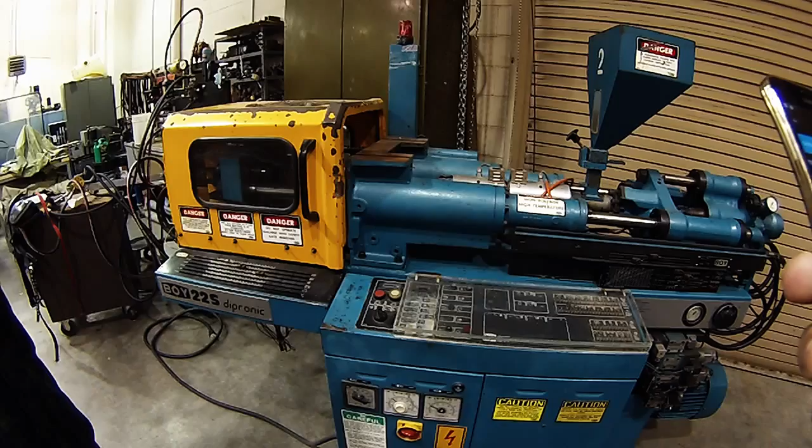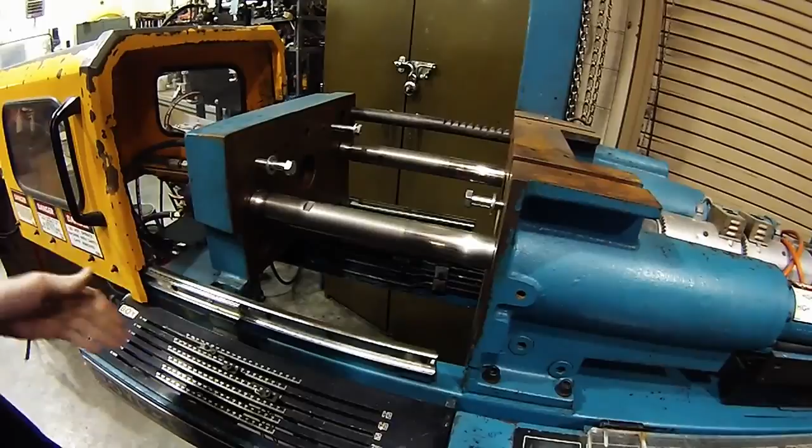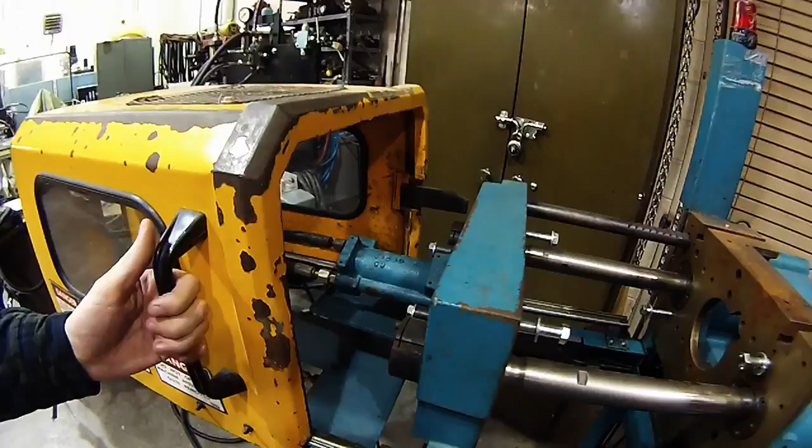So first we're going to go over some basics of this German-made Boy 22S that MSU recently purchased. We have a little protective cover here. And then our fit system is going to slide in here and bolt one side to here, one side to here. Your two mold halves are going to sit inside of that. Then over here we have our hydraulics that run the ejector plate, which ejects the part after it's been dried or solidified.

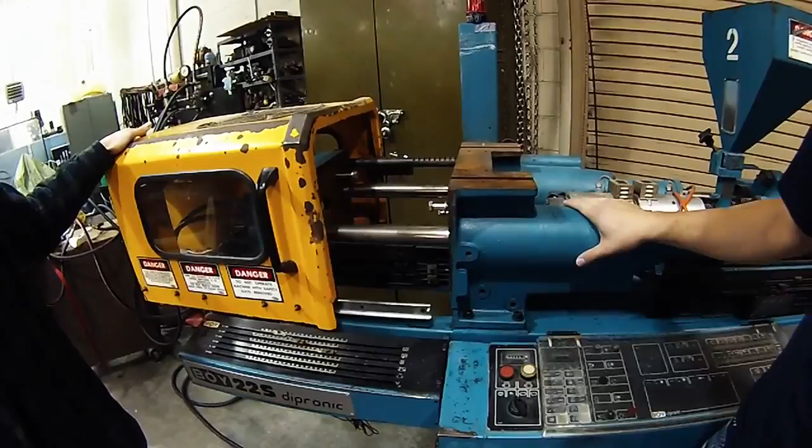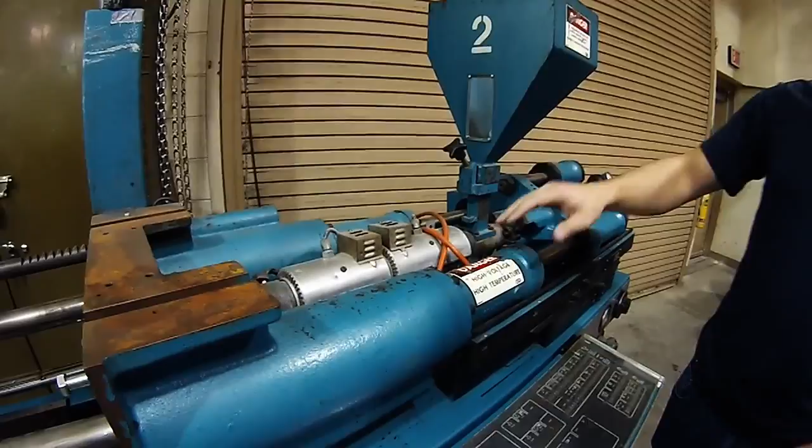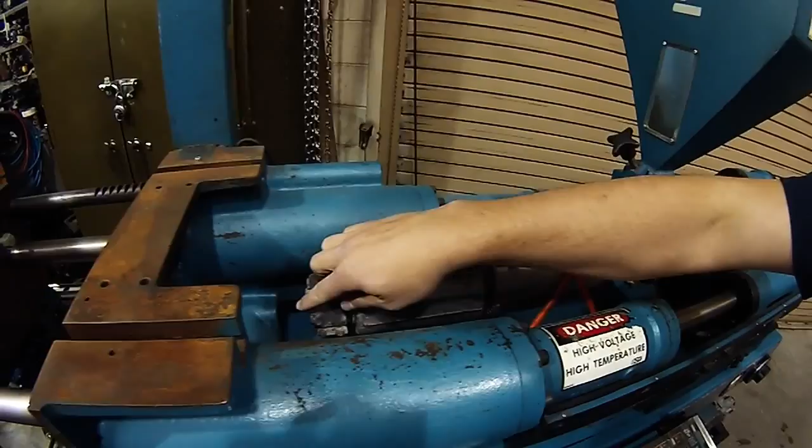And then next we have the hydraulics here. These hydraulics run this back plate that will close and clamp the two mold halves together. So once those are held together, you will have plastic from this hopper here running down into this auger through a heating element. So your plastic will be melted, and then through this sprue it will be hydraulically forced into the mold, held, and then the part will be allowed to cool, and the hydraulics will open and eject the part and then close again and repeat the process.

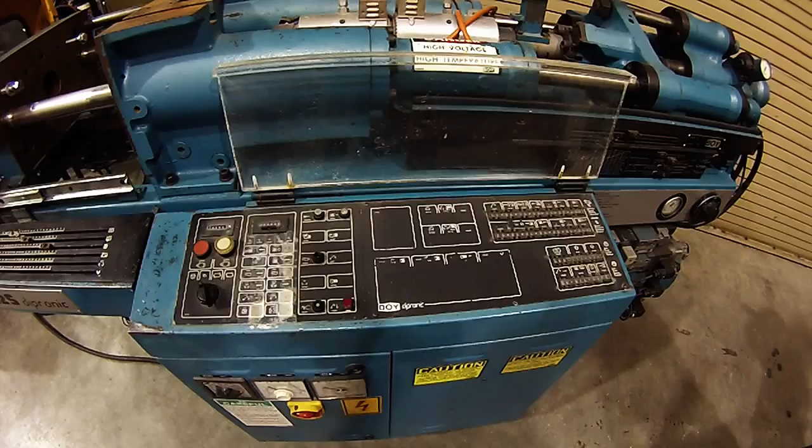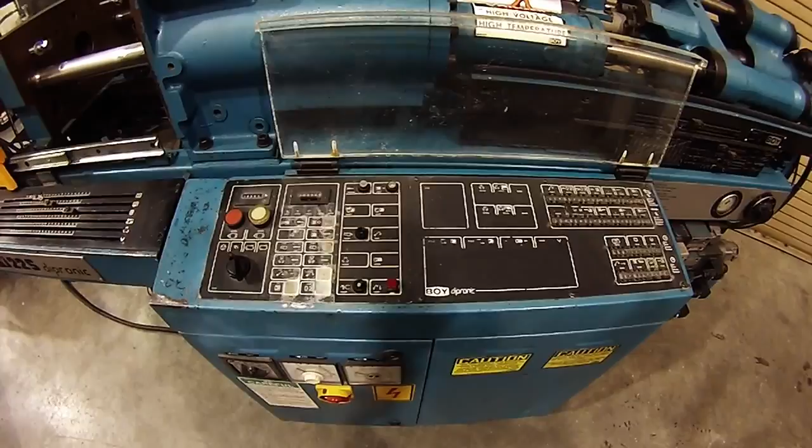Plastic injection molding involves many process variables that can be adjusted, including injection temperature, injection time, injection pressure, and the amount of time that is allowed for the plastic to cool. They are all controlled on this dial board here, and this will be worked into the curriculum. Students will have the opportunity to adjust these variables for two different plastics, polypropylene and polystyrene, until each plastic fills the mold in an optimal manner.

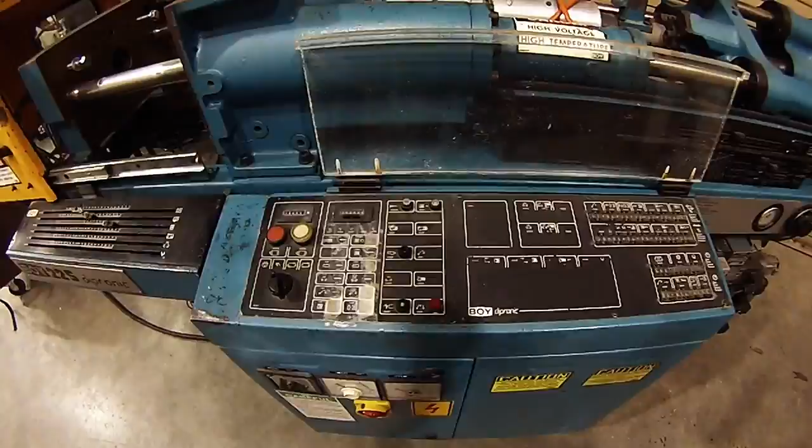For our project, we chose to make two different parts. We chose the first being this fly fishing nail knotter tool, the second being a single carabiner. We chose these two parts because they have similar wall thicknesses but distinct geometries to show how molding changes. These settings will be able to be changed on the dial board, which was shown previously. Depending on both the material and machine parameters, the mold will either fill or have voids, and each material will have different characteristics which the students will be able to explore.

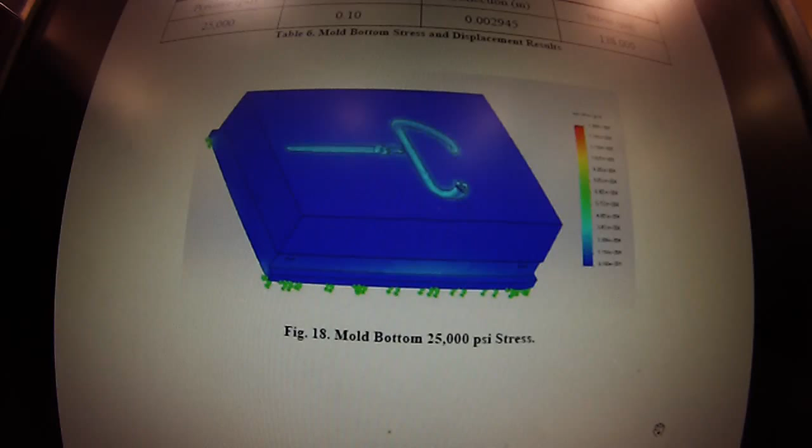SolidWorks simulation was used to analyze our mold half. It was fixed on either side of the rail here, just like it will be fixed in the machine. A 25,000 pound per square inch force was applied to the entire mold cavity, which was going to be the worst case scenario for the machine. Maximum deflections were found to be right under 3 thousandths, which is acceptable for industry standards. 3 thousandths of an inch of deflection is an acceptable value.

If the value was over about 6 thousandths of an inch, flashing in our mold halves would occur. That is when molten plastic escapes the cavity of the mold and gets in between the two mold halves. This can be an issue because you will then have faulty parts.

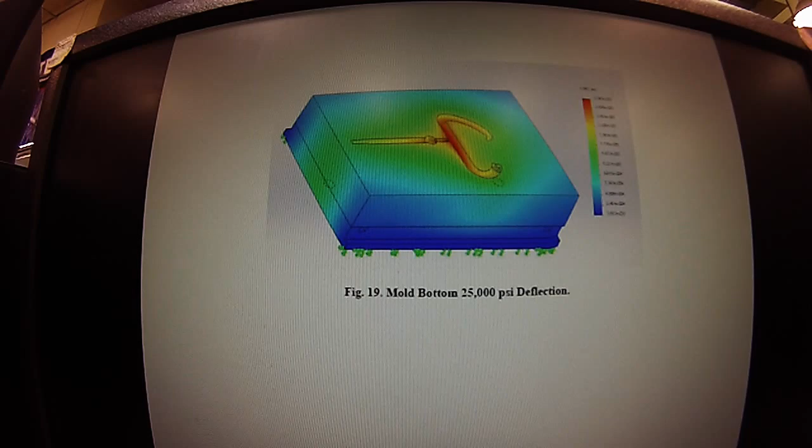SolidWorks simulation was also used to perform stress and strain analysis on the carabiner and nail knotter. It was found that the carabiner, made out of either material, can withstand a tension force of up to 10 pounds. And analysis demonstrated that the nail knotter could withstand a bending force of up to 40 pounds.

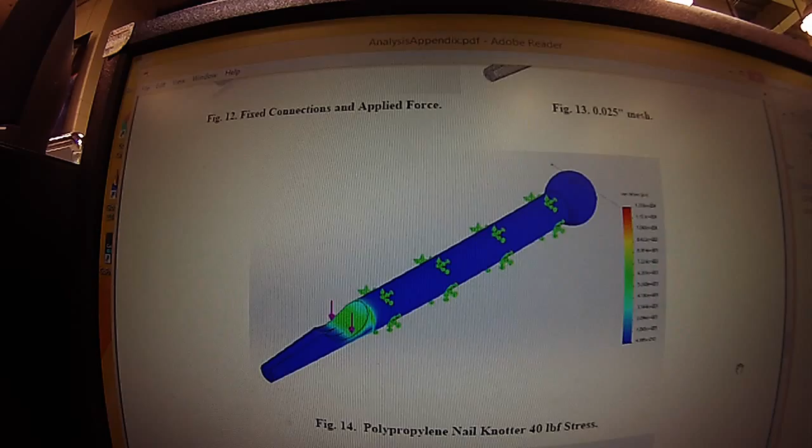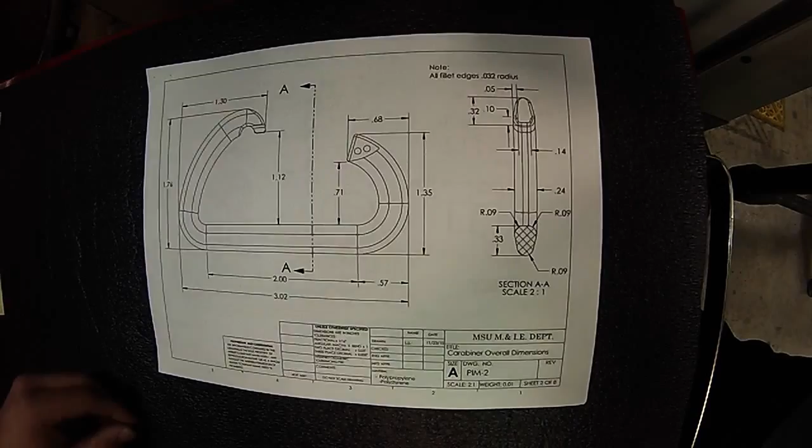This is the drawing for the entire mold assembly, including the ejector plate and all ejection pins, locator pins, return pins, as well as the necessary hardware to assemble the entire mold and fit system. And here are the drawings of the parts we created. This is the carabiner, drawing 1 of 3. Here is the second drawing with the necessary details for the end conditions. And here are some more radius dimensions.

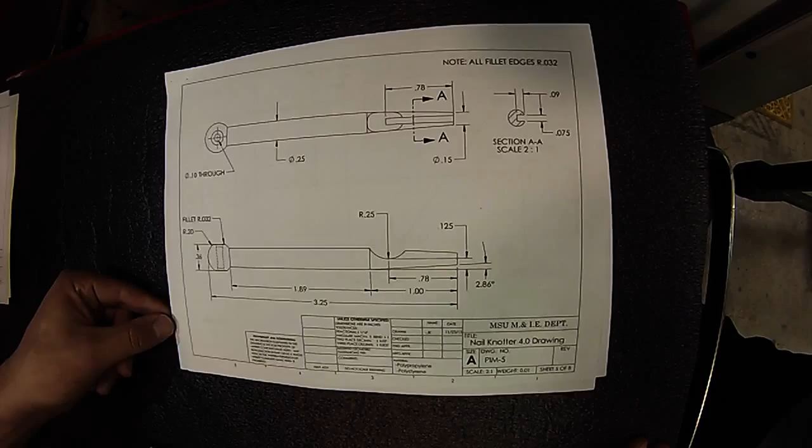This is the drawing for the nail knotter. This drawing shows our ejection plate with the necessary holes for the ejection pins. Right here are the pins that will be ejecting the nail knotter. These holes over here are going to be the pins that will eject the carabiner. The holes on the outside are for the return pins.

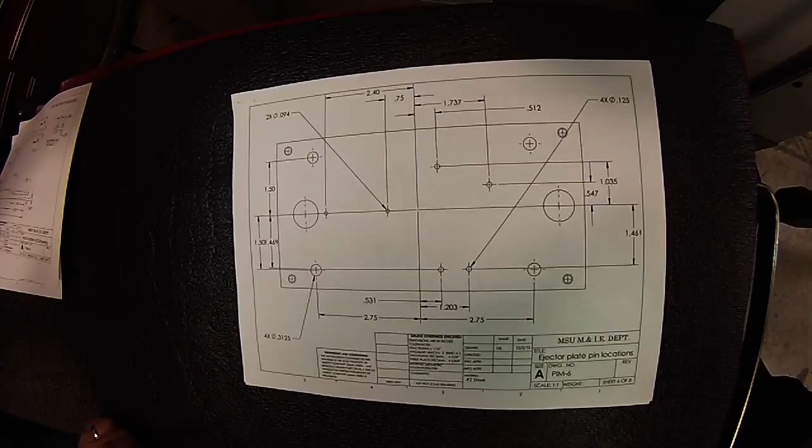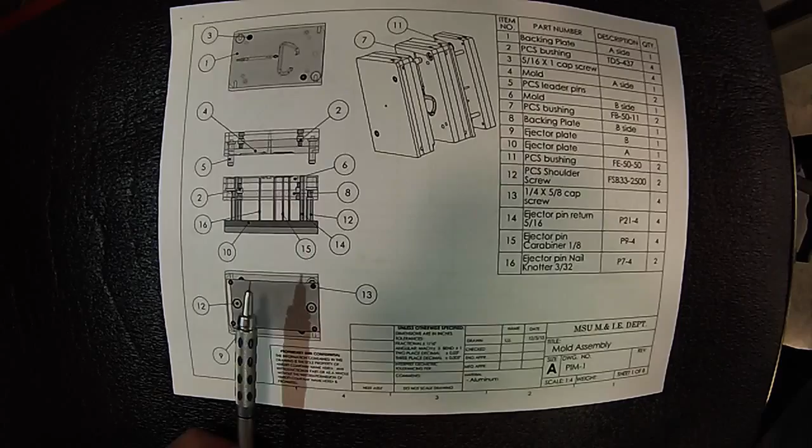Here's a view of our mold A side. Right in the center you can see the location of the sprue. The sprue will be machined on a manual machine. The part detail, however, will be done in the CNC mill. Final grinding will also be done. The ejection pin holes will be made using a manual machine as well. Once the manufacturing is done on our mold, we will insert the fit system as well as our mold blanks with the parts created. We will begin production and start creating parts.